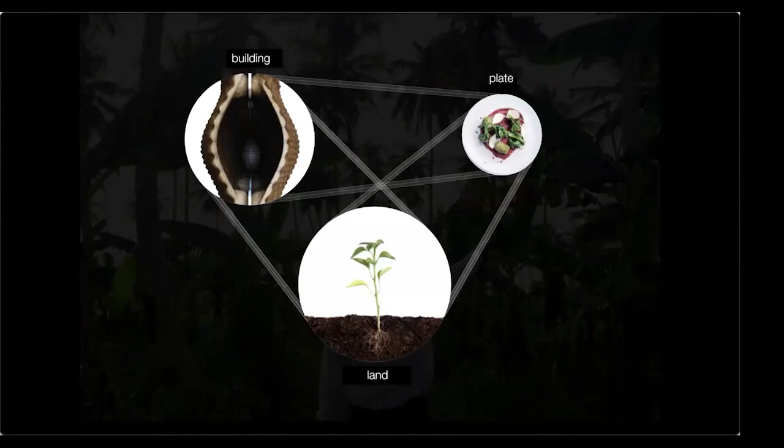I wanted to ground the projects around this framework, which underpins how we position the architect and who the collaborators are. There are different types of communities based on the placement of the architect in this framework, but really this describes the way we extract value and transform it.

We extract value from our land, whether it's mineral or bio-based systems. We transform them through agricultural to industrial labor. A lot of that value ends up being accumulated by an owner, an entity, whether it's a corporation or the state, which acquires a ton of that value. And that value is sold to consumers.

Often we have no value affiliated with what happens to those materials after they leave the hands of consumers. And that generates what we know today as a ton of waste problems, landfill to other forms of ecological pollution.

In that framework, we've been trying to identify at each stage where value is alienated. This verb 'alienation' really has to do with the fact that we grow large amounts of monoculture, single species of plants that end up over the long term exhausting or depleting a lot of the nutrients, affecting the long-term capacity of the land to continuously produce at those scales.

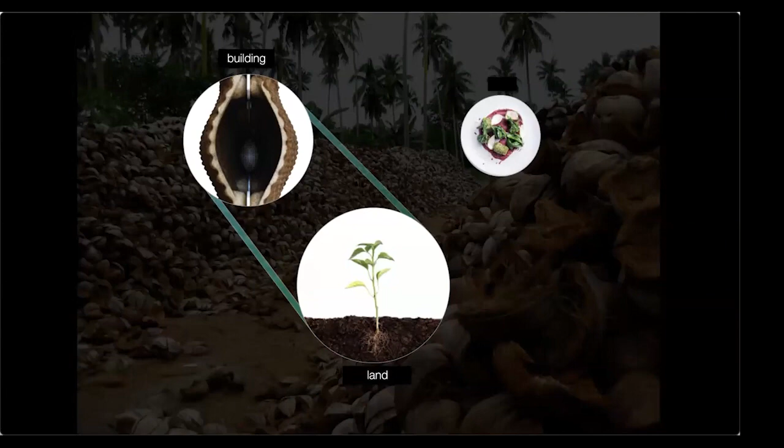The first project is informed around the movement of materials that are left on the field or lost somewhere between the farm gate and the sites of consumption, whether it's the grocery store or the market, in the form of agricultural waste. We produce a sheer ton of agricultural waste every year.

So this is a renewable resource. About 9.4 billion tons were produced three years ago, and we assume that basically about 40% of all this material is wasted—it never necessarily makes it to the food or to end consumer products.

The production or the scale of these materials is so intimately tied with our growth as a species. The more our populations grow, the more food we need, and the number of byproducts expand from this driver.

When we look at the spectrum of agricultural waste that exists on the planet today, we see there is a disproportionately large amount of the big four: sugar, corn, rice, and wheat, all of which are descended from legacies of empire and industry. To a large extent, a lot of the other agricultural produce is actually a blip on this map.

We began by working with coconut husk. This was our flagship material, mainly because of the compositional uniqueness of the husk, which has a really high percentage of structural lignin, the binder found in all plant materials, and relatively low sugar. In many cultures along the tropics, it's been used for a broad range of building applications, from insulation to woven products to roofing sheets. So this was our flagship agricultural waste.

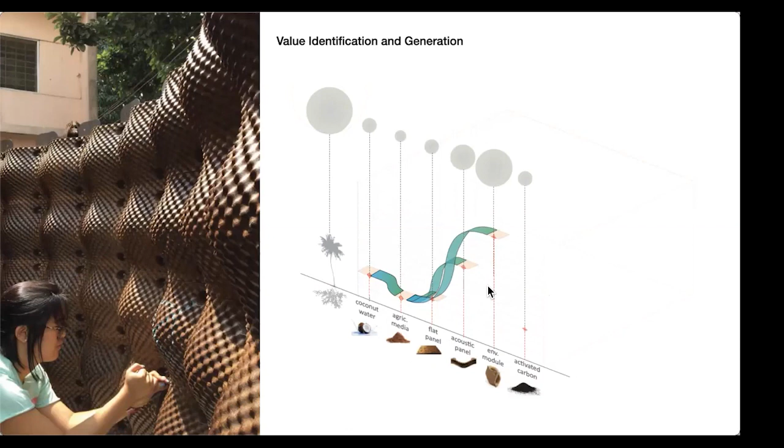So we've developed a spectrum of many life cycle possibilities for coconut husk, ranging from mechanical structural high density boards. We call them binderless because essentially the glue is actually found in this dust-like substance already in the coconut husk.

All the way to products that don't require heat, temperature, or pressure to make, but instead involve milling and reconstitution into light, fluffy, low density materials that are very good at absorbing moisture or even sequestering indoor air pollutants. All of the intelligence around the plant architecture for photosynthesis is retained in these low density applications as breathable materials.

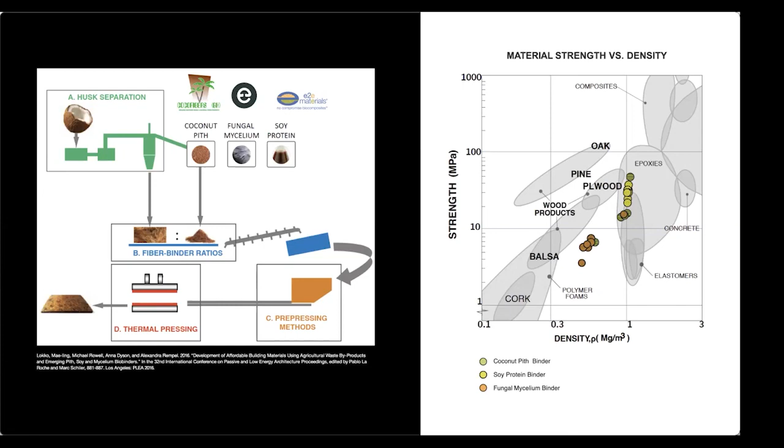So for us, evaluating all the conditions, how do we actually reduce the energy and resources needed to produce these materials is key. We've experimented with a range of bioadhesives, from the coconut pith to soy protein, which is a large-scale byproduct also in Latin America, to fungal mycelium, which is abundant fungi organisms capable of naturally digesting some of the sugar components in the husk in order to grow building materials.

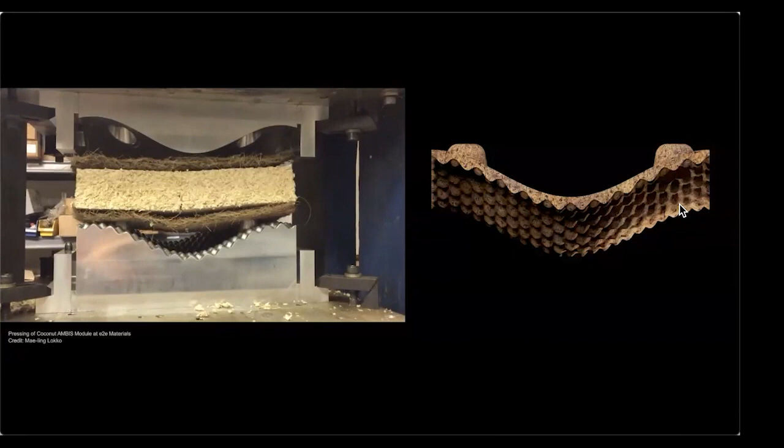Here you can kind of see a collaboration of a range of building agricultural waste. So you have the coconut mats with a soy protein binder. In the middle, you have corn-fed fungi, mycelium, pressed in a sort of layered Kit Kat form.

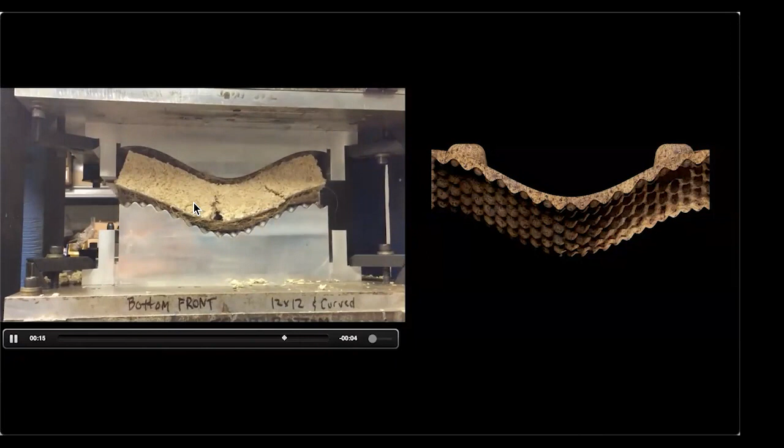That's important for us because, given the scale at which coconut is produced relative to something much more abundant, like the big four, like corn, there's an opportunity to layer our building materials in ways that bring down cost but also improve performance. Everything from thermal to acoustic performance is improved in that corn sandwich, and the panel is incredibly light, which also cuts down on distribution costs.

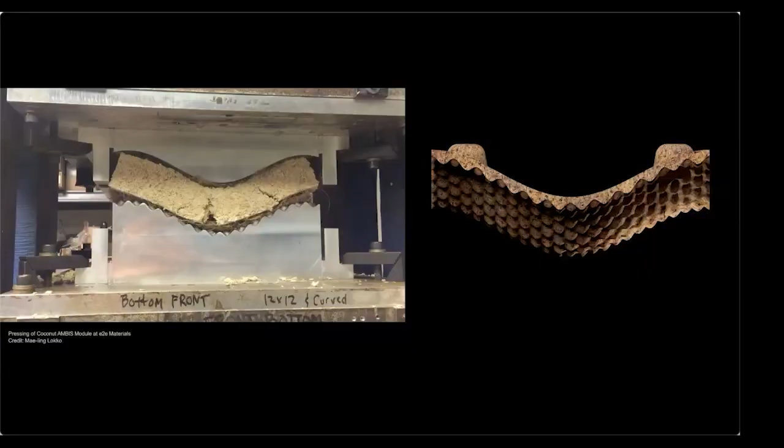It's also important for us when we're working with communities and other types of actors within the agricultural value chain to think about the value that each is bringing to the table. And often there aren't a ton of ways of qualifying and quantifying the value that agricultural, informal, artisanal stakeholders bring to the framework.

This is ongoing, but thinking about other forms of translating cultural capital to a currency that makes sense. We look at it through everything from cost savings to time savings to speed of distributing materials, for example, as a way of bringing that back to the value that these networks, these communities bring to this framework, all the way down to the waste manager.

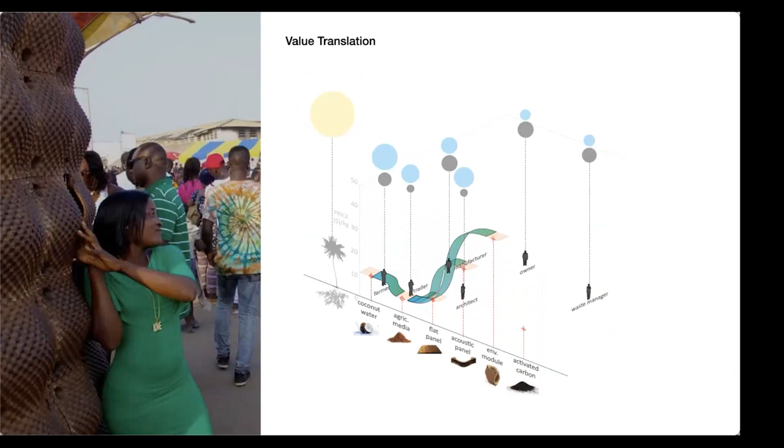This is really important to identify and translate these values because that serves as a basis for beginning to then circulate all of that new profit that one achieves through a high value product.

So this is sort of a bridge to the second project, which largely looks at using fungal mycelium as a transformation technology. Fungi is found in every culture and millions of strains throughout the world. For us, it was a very important kingdom of life to work with, mainly because it doesn't require a ton of energy, not heat.

It just can grow in room temperature, cover it, and all of the conditions - the moisture, high humid environments - is what is needed to grow these building materials. So we were looking at people or community groups that have access to relatively large scales of agriculture and food waste in the city.

This is primarily work that is done with urban farms and transforming some of their waste into mycelium.

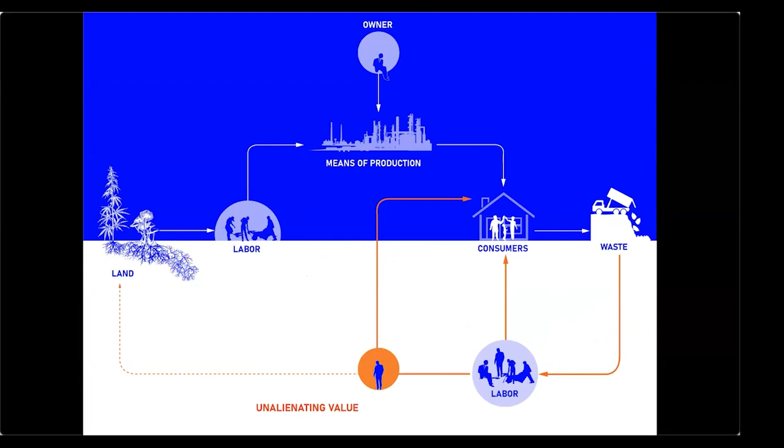The fungal technology, which has emerged over the last decade, is really built around a mycelium strain that is able to digest agricultural substrates and grow over the course of 5 days into this sort of low density material.

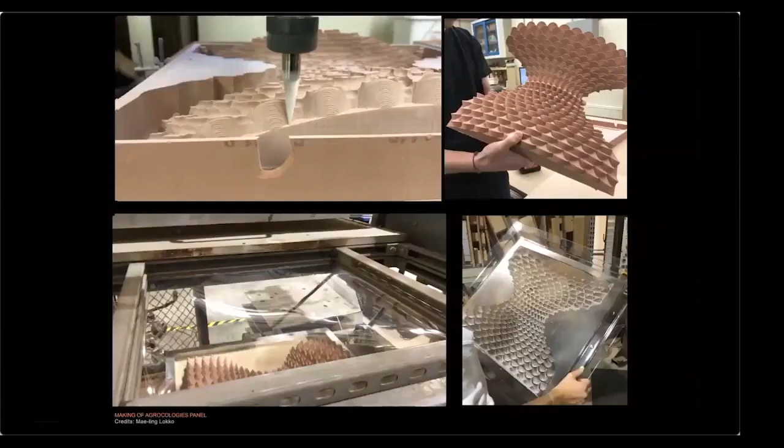As a designer, we were working with, or scaling up, this grow-it-yourself as opposed to do-it-yourself methodology by developing these human scale, very lightweight grow trays where customization and form could be embedded into the design of the grow tray.

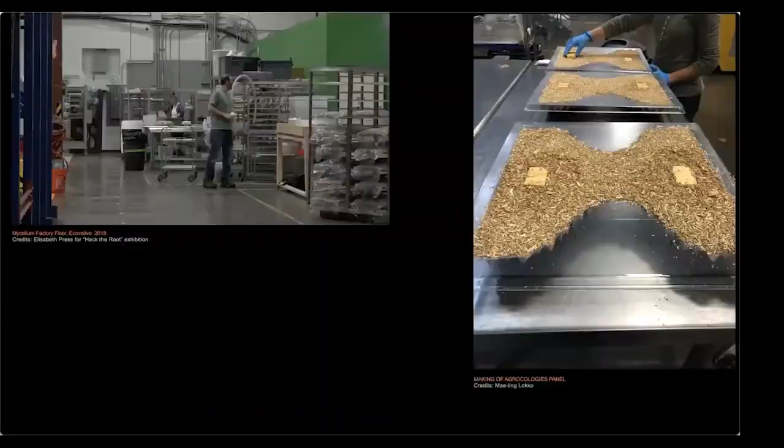Around which the mycelium and the agricultural waste could be placed into to grow, as you can kind of see over here. So over the course of 5 days, what you saw in the video is this digestion and transformation of all the sugars in the waste into sort of a myco low density material.

This project was working with an urban farm in Liverpool called Squash Nutrition, a fantastic distributed group of urban farmers and citizens that worked on plant sort of enterprises and schools.

We grew with 200 people using this grow-it-yourself methodology. Very simple kits, lightweight, they're made to interact with the scale of a hand.

Additional nutrition is added from flour that comes from your kitchen cupboard, but is essentially grown in these trays over the course of 5 days, but it's grown on site in the site that you're using it.

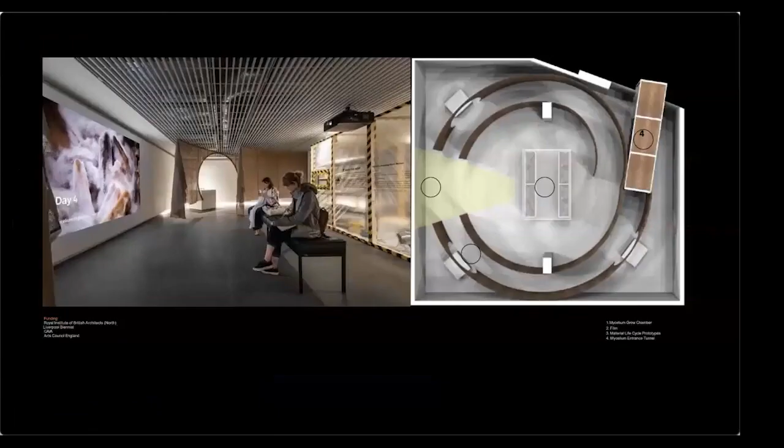In this case, it was the Royal Institute of British Architects Gallery, where we actually had the grow chamber, sort of like a construction site, essentially, right in the middle of the gallery.

At the entrance to the gallery, we grew a tunnel made out of these panels. This sort of lightweight grow chambers and kits are essential for basically being able to transform some of the food and agricultural waste right around the urban farm or the kitchens where they are produced.

We expanded the project by looking also at the agricultural inventory in the south of France, in Arles, in the Camargue region, where 40% of all France's organic produce is grown.

Essentially, we started looking at agricultural waste, food waste, as well as invasive species, looking at a range of communities - from enterprises which are trying to rehabilitate prisoners, all the way to more commercialized community kitchens, in and around this institute we're working with, Luma Foundation.

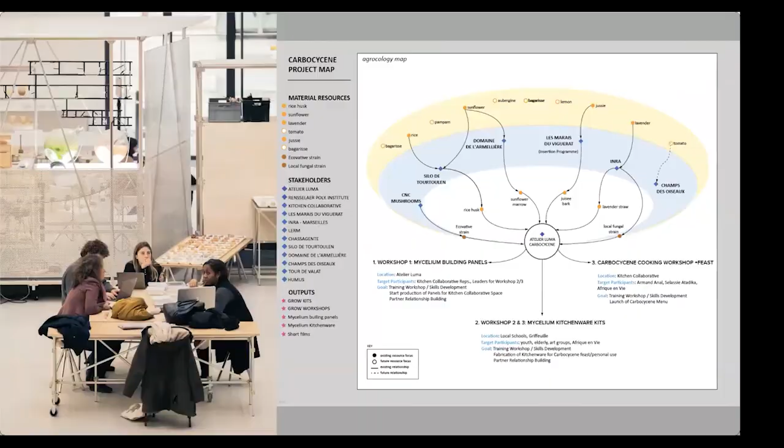So you can kind of see a wide range of agricultural food and invasive species. We were sort of trying to understand the common denominators - how much sugar, how much lignin did these materials have - in order to understand the thresholds of each material and open up the possibility of mixing and matching.

So that one did not rely on a monoculture, but understood the possibility for substitution according to seasonal cycles, and being able to predict what type of building products could come out of that exercise. And so in the community kitchen, there's someone.

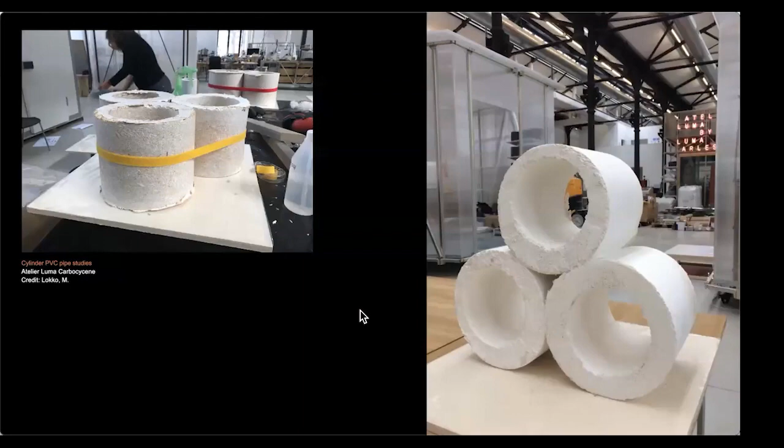I'm going to skip past this because I realize I'm running to the end. This last project is working with a community of women home-based enterprises in Ghana, where I'm from. This wonderful company called Global Mamas began with 6 women who would make high-quality textiles in their homes, and now has scaled up to 600 women throughout the country.

They've very much been evolving their model of production to become incredibly circular and responsible - from unalienating their consumers, so they know exactly whose hands, whose inputs, or what materials went into their products, to treating every aspect of their textile production line to reduce pollution and tap into the regional agricultural inventory.

One of the byproducts of this wonderful scale-up of their textile business - these are some of the textile batik, high-quality batik textiles that they export. There's also a very vibrant domestic market that they sell to.

Basically when women come together as a group in an urban context, they began to generate pretty toxic textile wastewater. So the Environmental Protection Agency in Ghana mandated them to treat their water before excreting it into the municipal water systems. That water had a ton of heavy metals.

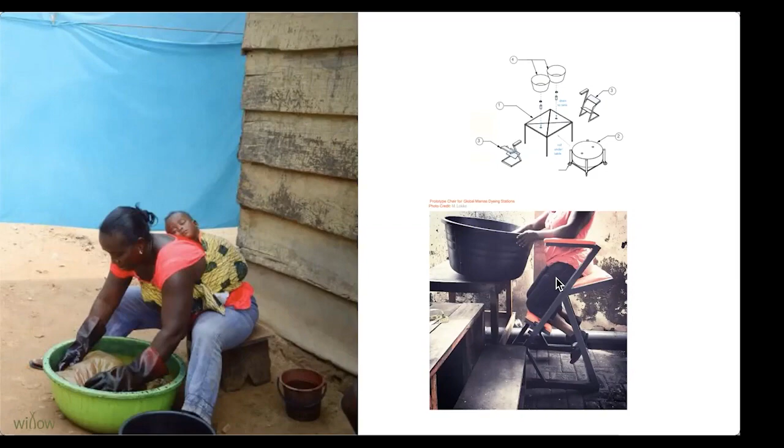All of those issues the mamas understood because they do this on a daily basis. And we co-designed a new type of batiking station made out of everyday materials that they could easily source, with small-scale water tanks sized basically to collect textile wastewater for a week.

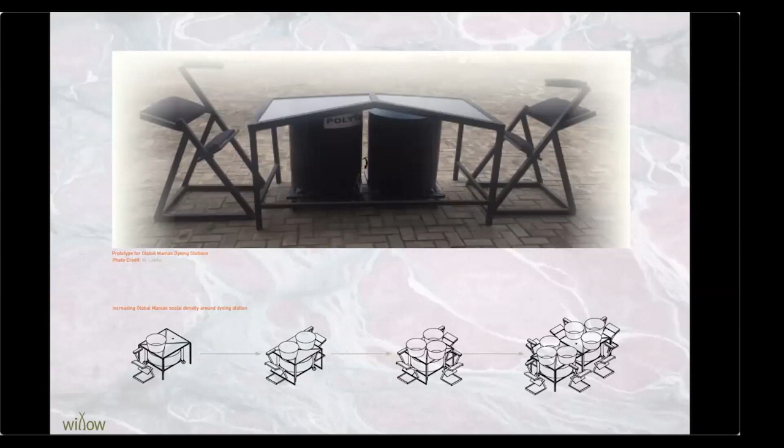Moringa is added at the end of the day on Friday, it's mixed and has quite a bit of time to settle. They come back on Monday morning and that's drained out. So that's the moringa batik dye system that is now being scaled up in a semi-centralized facility that they're building in the eastern region in Ghana.

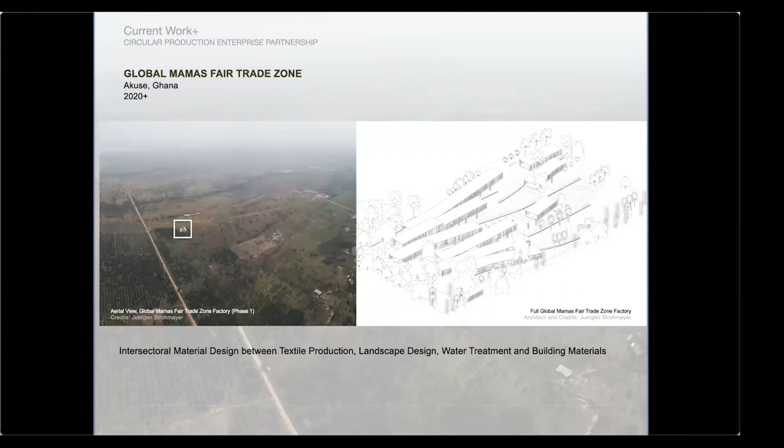Together with Anna at CEA and Dita, we're also forming a south-to-south knowledge exchange around working with bio-based dyes and materials. I kind of want to return to the sludge to bring things full circle, because that sludge that accumulates at the bottom of that beaker is also a byproduct.

We're also looking at the development of sludge bricks, particularly in rammed or stabilized earth blocks.

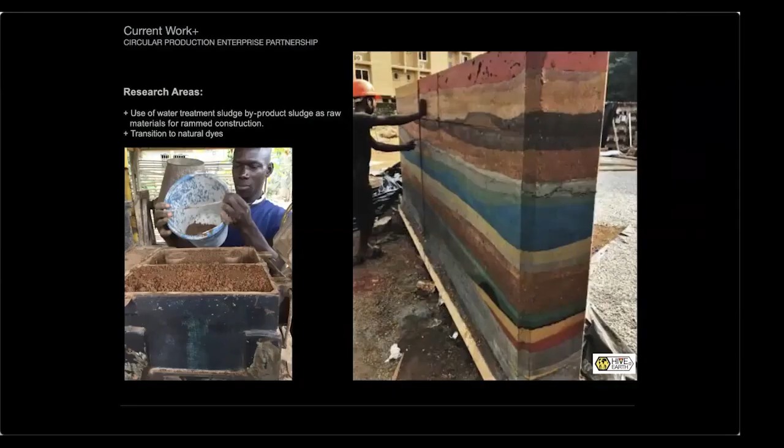As another type of product that could come out of that process. So I'd like to end there, and maybe open it up for a discussion later around how this might open up a more expansive role for architects and designers to participate, particularly in thinking about how to unalienate and return value back to this wide range of actors, whether human or non-human, in an effort to achieve some form of justice in our ecology.

Wonderful, amazing, thank you so much, Mae-Ling. I'm looking for the little Zoom clapping icon, this silent clapping is very unsatisfying, but that was incredible. I saw that Monica already joined us, so I think we'll just move on with the panel as we had it. After, we'll open up for a conversation because I'm sure the students have lots of questions for you, and I have a couple myself, but I'll hold them back.

Hi Monica, welcome, thank you so much for joining us. Where are you right now? I am in the mountains of West Java, Mount Salak. You're in beautiful West Java. Wonderful, thank you so much for joining us, Monica. I thought it was 7. No, it's 5:30 now, 5 in the morning. Oh yeah, 5 in the morning for you. I'm so sorry, that was very inconsiderate. It's okay.

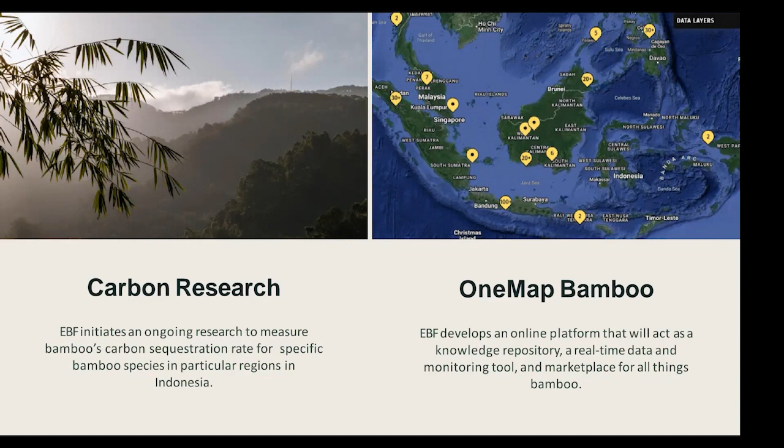Again, the role of EBF is basically to be the safeguard to make sure the economy built through bamboo agroforestry is fair and sustainable. So we believe that in not just working with the government, but we also put people first in the front line, and any development that we do, including with the private sector, we always tell them to send a message that it's people first. It's people and planet first. Public and private would follow.

Follow that pathway. We also did innovation through our partners. We developed the bamboo bicycle, similar I think to Ghana. What we want is to show that bamboo can be a very strong and potential material. The bamboo bike is more of our ambassador brand, shared at the G20 meeting. Aside from that, on the right side is basically where the bamboo came from in the villages and how it's being used.

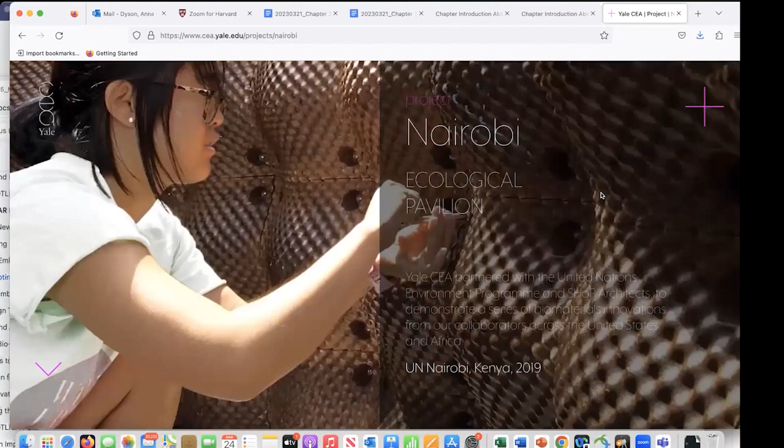As you can see here, this was one of the walls Mae-Ling showed, one of the systems we exhibited here in Nairobi at UNEA. We work very closely with a lot of organizations, including universities we're associated with through UNEA and others.

In this case, we had a series of exhibitors, including ourselves with the pavilion built here, looking at ecosystems like agriculture and food growing, and how we might piggyback off those systems to upcycle the waste streams, or not think of it as waste but as circular.

One really important thing is that this pavilion you're seeing entirely examines the potential to use solar energy to take all the detritus we have when we process bamboo. A lot of the bamboo out there isn't really considered constructible for major construction, or part of a kind of industrial economy.

We typically use green bamboo for industrial purposes, and there's a lot of waste as part of that process. There are also species of bamboo, like the yellow bamboo here in the highlands of Guatemala, that aren't really usable currently in the systems we have today. So we're looking at how we can take these byproducts and use them differently.

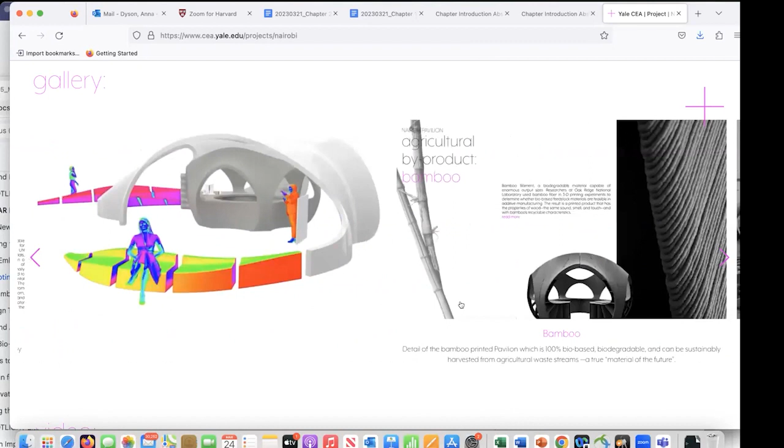We're also working with SHoP Architects and Oak Ridge National Labs, trying to understand what are the structural characteristics we might get out of the bamboo waste and soy binders, and also how we might create, on the side of farms or others, these kinds of scaffoldings that might be appropriate for the kinds of systems that we grow.

So we have a lot of research also in so-called phytoremediation or bioremediation, using the growing of plants and other agricultural products like mycelia, for example, that might be harvested and also used for the purification of water and of air. So maybe since Mae-Ling has already touched on some really beautiful examples of the coconut coir and other things...

I might actually go into - you can find, I'll go to material, maybe to material systems - I'll touch a little bit on aquaculture and how we can, in a sense, harvest - not just that in the Nairobi Pavilion, that was an example of systems coming from bamboo, soy, rice, mycelia, coconut, et cetera, a lot of those agricultural crops.

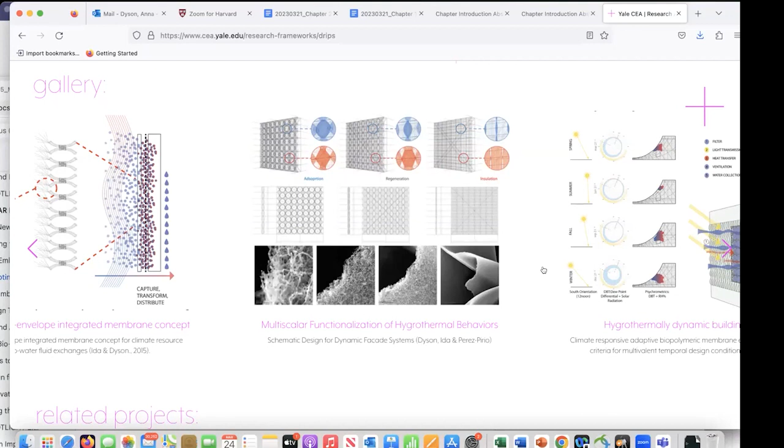So it's not regenerating the water table, it's not available as rain to be collected. We have to figure out how to take that water out of the air and convert it into potable water. So this is also an area of water collection and adsorption.

You can see what some of these hydrogels look like, and how we reconstitute them potentially into microsystems, or even in some cases they get quite large. We're figuring out different ways that we can regenerate and get that water. In fact, some of these things are quite ancient, like the water nets and collection systems they have in areas like Chile.

In our case, there are 3 different ways that we test to collect the water: mechanical regeneration, literally just squeezing the gels or sponges; chemical regeneration; and thermal regeneration, which is heat, where you can basically have a lot of the water release from within the envelopes.

And then deliver. This is tied in to an area that we're testing now, and we'll end with where we are today, before passing over to my colleague Dita Zakova, because we just got back from the university here. This is where we are today, at Lake Atitlan, and we just got back from our partners in UVG, Sololá, the University of Guatemala. We work very closely within large university networks.